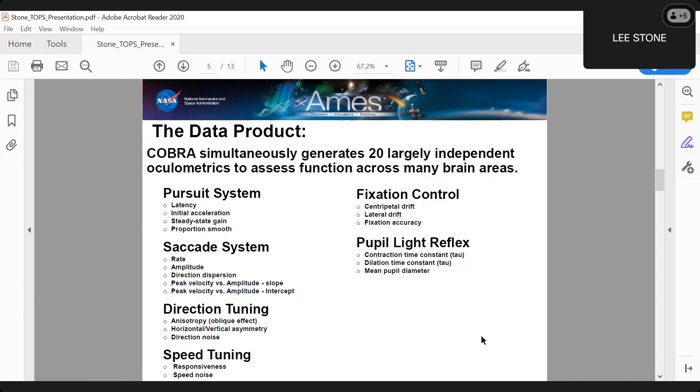One of the most reliable ways of causing a reversible and safe neural impairment that many of us have some subjective experience with is alcohol. So we did an alcohol study where we generated dose response curves and measured how well these 20 metrics that come out of your eye movement measures tell you about your function.

This shows you a plot of 4 of the 20 parameters. This has all been peer reviewed and published and rigorously statistically tested. What this shows is deviation from your baseline. These are within-subject baselines where each subject serves as their own control. And it's a dose response.

How deviated are you from your normal as a function of blood alcohol level? All of the data points you see here are underneath the legal limit of 0.08 in California and in most states. And what you can see here is a clear linear trend of impairment across these 4 different metrics. The impairment is not small. These are like 10%, 20% reduction in your gains, 10 millisecond delays in your responses, 20 to 30% reduction in your initial accelerations. So these are not subtle effects.

I want to point out the X scale here is in blood alcohol levels. Basically 0.04 is approximately 1 drink, 0.02 is half a drink. And what you can see in those red symbols here is that there are significant deviations from people's baselines at less than half a drink.

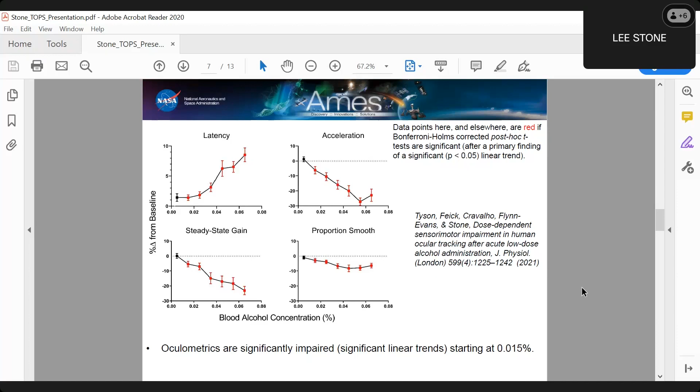So this is picking up incredibly small deviations from their performance. I think the take-home message here is you can detect things that they subjectively don't even know is going on. And then in a separate study, we looked at sleep deprivation, which is another common stressor that we have all experienced.

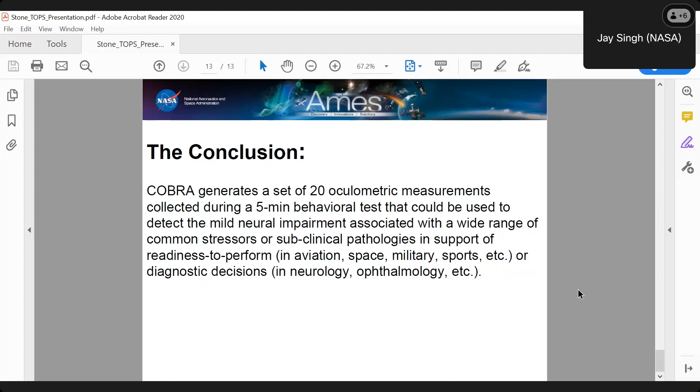I'm going to answer the first question first - I've been talking to Dr. Leung at Stanford about doing a glaucoma study, because I think COBRA has a strong potential to be able to pick up very, very early functional deficits caused by glaucoma.

So that's a feature, not a bug. It would be able to detect things perhaps even sooner than standard state-of-the-art techniques.

Going back to your first question: what would you have to do if you wanted to commercialize this? This is about $1,000 to $1,500 worth of equipment when you buy it off the shelf. You would have to set up such a system and write the code to get it working in real time and accurately, have your optics and everything else set up well, and then analyze the data in the way we have shown works. This is a very short lead time issue because you don't have to invent any new technology to get this to work—you just have to figure out how to assemble it.

Obviously, if you were buying these to make many, you could get much cheaper cost than when I had to build mine. I have three of these set up: one at Stanford, one at JSC, and one at Ames. As I said, it costs about $1,500 to build. My guess is you could lower that by an order of magnitude, and it would take 6 months to a year—that might even be an exaggeration of how long it would take. If you have a team that knows how to work with programming, setting up visual display hardware, and real-time data acquisition, it should be very straightforward and can be done quickly.

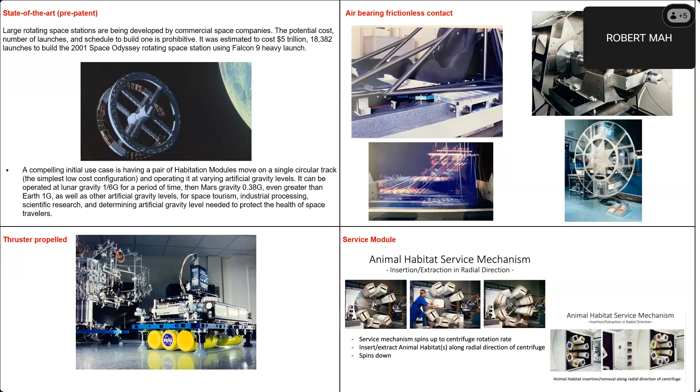So the algorithm for that is available. The whole system is mass balanced in real time to minimize any disturbance to the artificial gravity. Anyway, that's what I wanted to present.

So are there any questions? Great, thank you so much, that was very interesting.

Kind of along the lines of, while people type in their questions, what do you think, maybe not so much the cost associated with setting something up like this, but how long do you think it would take to validate this in space? Would it just be trying to get a smaller module on a rocket and test it out, or what do you think is the best way for companies to look at this as a way for commercialization?

My recommendation is just build a small prototype on the ISS. You add a circular rail, and then the habitat could be something that you build, or you could use the Bigelow ones, which are self-sustaining, and use that as a quick way to get humans on artificial gravity.

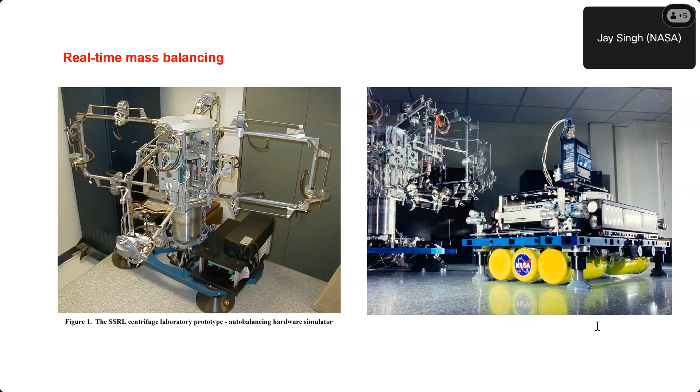Well, you look at human centrifuges that they try to fit in the ISS, so that's the smallest, but you have a lot of gravity gradients. Optimally, you want something that's rotated at 1 or 2 RPM, and that could be, diameter-wise, a couple of football fields in diameter.

Okay, so that's to minimize Coriolis effects. When you're on a merry-go-round and you move your head, you feel these weird forces. That's what you need to minimize.

Got it. And we have one last question: is there any reason not to simulate 1G?

No, I think you should, because part of it is to go to Mars and back. What level do you need to prevent the health deterioration? The analogy—what I think the research shows is that after months in space, you lose decades of bone, and when you come back, it doesn't totally recover.

So the analogy was the Eiffel Tower. If you have structural failure and you repair some of it, but not all of it, it could tip over. So can you survive that, to Mars and back? That's a big question. Good point.

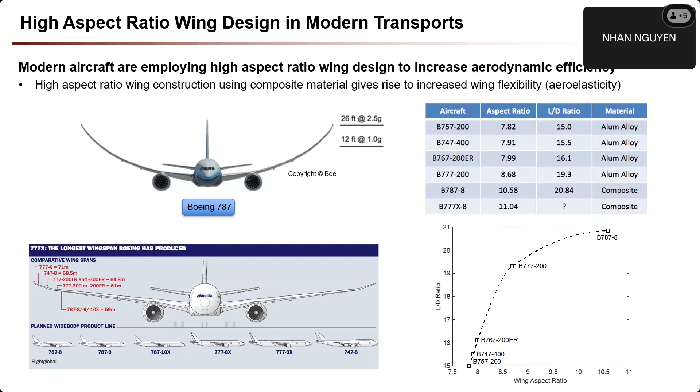And so these modern aircraft, like the 787 and the upcoming 777X, have very long wingspans. Go to the next slide.

So what happens when the wingspan increases? We call it a high aspect ratio wing. Then these wing shapes actually cannot maintain their shape in flight. They can only maintain the design shape at the design condition. But when you cruise off the design condition, like at takeoff or landing, the wing shape changes drastically, and that shape-changing wing can lead to non-optimal aerodynamic performance—there's an aerodynamic performance penalty due to the changes in wing shape.

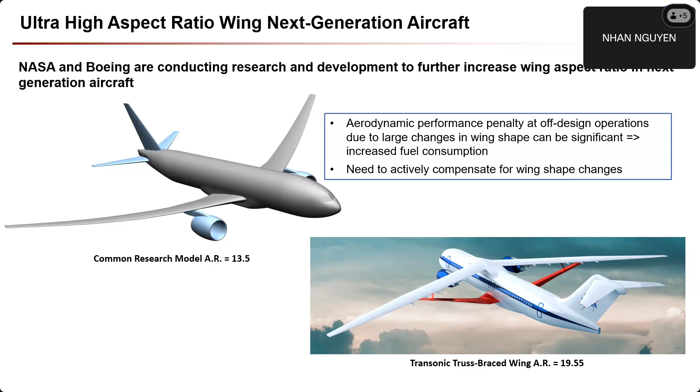So the purpose of real-time drag optimization technology is to provide a methodology to actively compensate for wing shape changes in flight. Next slide.

You can think of this like an adaptive wing technology. If you have the ability to change the wing shape in flight throughout the flight envelope, then that wing shape is extremely efficient—it can minimize fuel burn consumption at all points in the flight envelope. You can think of it more like a bio-inspired concept; we know bird wings are highly adaptive because they change shape continuously in flight.

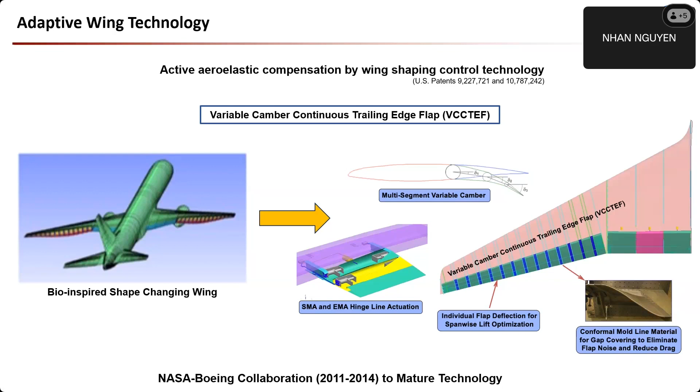And this was a technology that we developed in prior work—we call it the variable camber continuous trailing edge flap system. We actually worked with Boeing on this technology and matured it. Next slide, please, and you can skip the next slide—I think it's just a little eye candy thing and we don't have time.

So we're going to go to the real-time drag optimization. Think of the adaptive wing technology—that conformal flap system—as like a body, and then you need the brain. So the brain is the real-time drag optimization. It provides the processing ability to tell the adaptive wing to reconfigure at any point in the sky to minimize drag, hence fuel consumption.

So the technology basically is about having onboard sensors and also an onboard model. It's really a sensor-driven technology, and the onboard model is continuously updated in real time by a system identification, or model identification, process. Because the model is updated in real time, that eliminates the need for any validated math model for offline optimization.

Now, the current aircraft industry does use offline optimization. They have programmed into the FMS aerodynamic databases, and you can use table lookup to find out at what point in the sky you want to reprogram the control surfaces to move to certain deflection angles to reduce drag. Here we eliminate the need for that offline strategy because now the model is updated in real time.

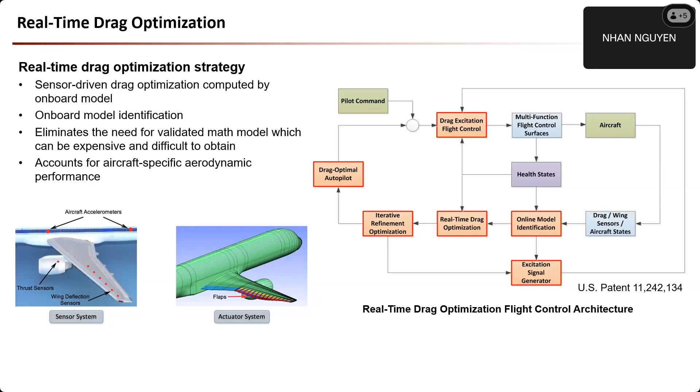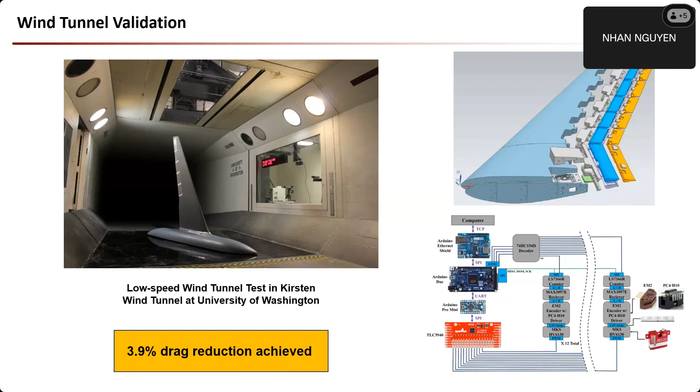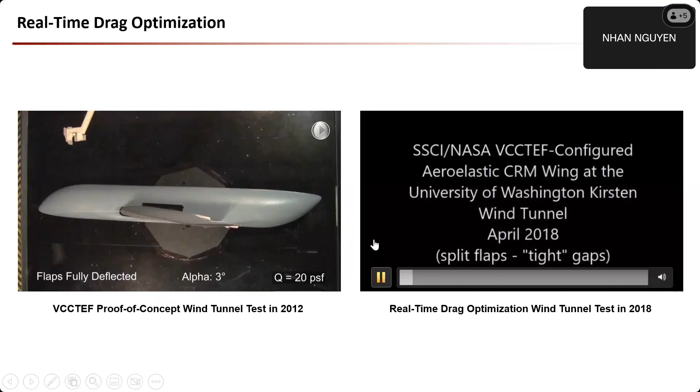Next slide. If you could click on the image on the right, this is a video of the test we did during that experiment. You can see the wing is a pretty high aspect ratio wing, and we have those control surfaces along the wing, going through periodic sampling, or what we call excitation.

It provides excitation input to the wing, and there's measurement of lift and drag from the strain gauge balance. We collect the data and do onboard model identification, and using that, we compute the necessary control surface deflection to seek a minimum drag solution from the onboard model. We did this test and it was fairly successful.

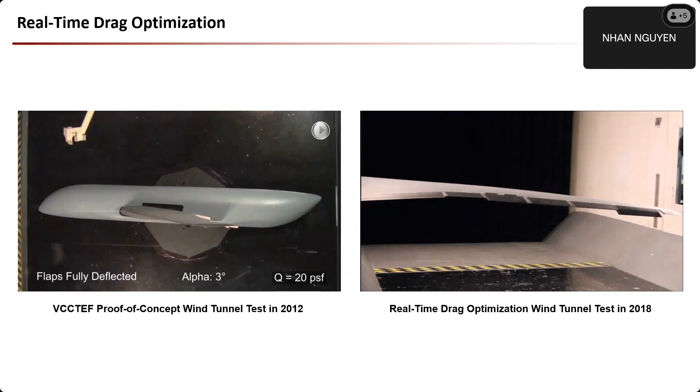We have an upcoming test - we're working with Boeing, going to do the same strategy with maybe some further improvement. That test is coming up in the next few months or so. I think this is the last slide, so at this point I'd like to open it up for questions from the audience.

Thank you, that was very interesting. While we wait for questions, it's kind of similar to what I've asked everyone else - how long do you think it would take for a company to integrate this into their systems, into the design of their wings and things like that?

If the aircraft already has control surfaces tailored to do this particular control, like real-time drag control, then implementation of the algorithm in software shouldn't take that long. The biggest time sink, in my opinion, is really having the ability to implement a control actuator on an aircraft wing, because typically conventional aircraft usually employ minimal control surfaces for flight control - like an aileron on the wing to do roll control, that's it. But in some modern aircraft, like the Boeing 787, they implement additional control surfaces on the wing dedicated to real-time cruise drag minimization. So if those control surfaces are available, and you have redundancy on the wing, implementation of the software is fairly straightforward. It should not take that long, in my opinion.

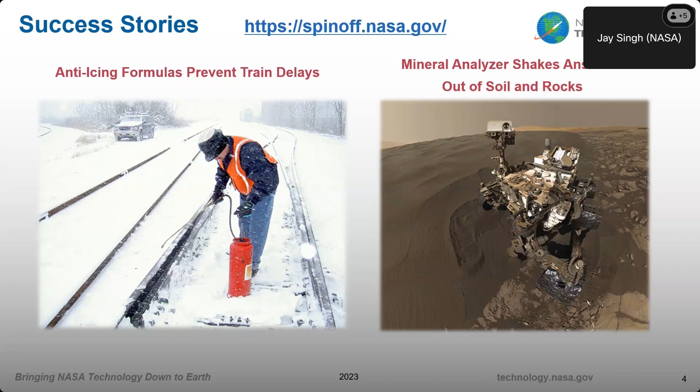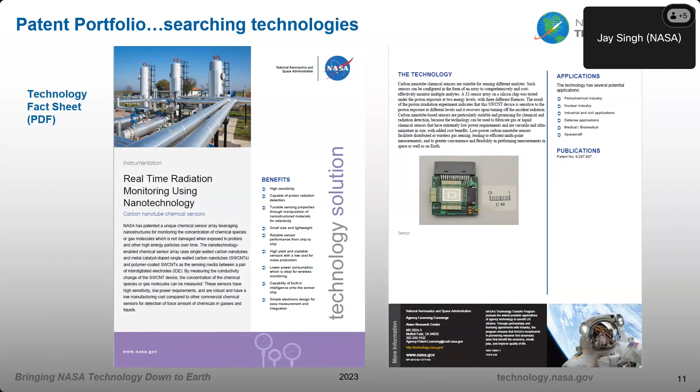If you want to download a fact sheet, just go to download fact sheet as a PDF, and you'll be shown something similar to what you'd see on the web page, but it's easily shareable - you can download it and send it to others. It also shows the publications, which here shows the patent number.

The patent is the most important part of reading the technologies, because the patent will show the claims and the description - and that's what you're going to be licensing: what it claims to be doing and the description of the invention. So those two things are very important to read before you apply for a license or ask questions.

Just wanted to reaffirm that your company must be legally formed in the United States in order to apply for a license.